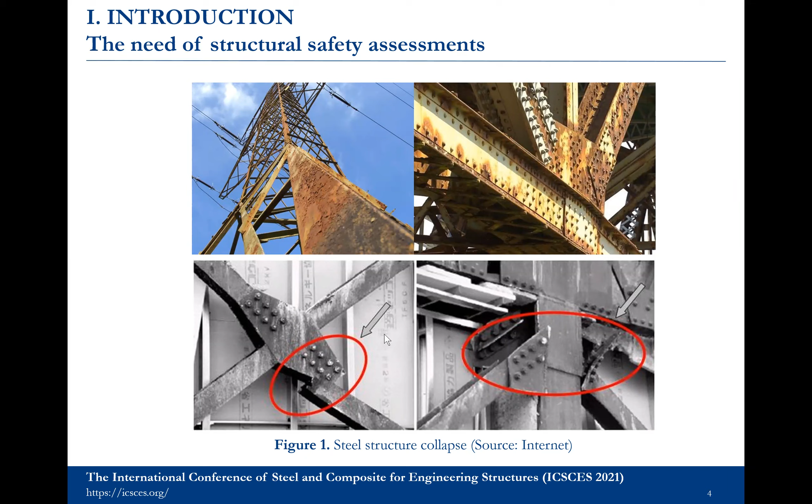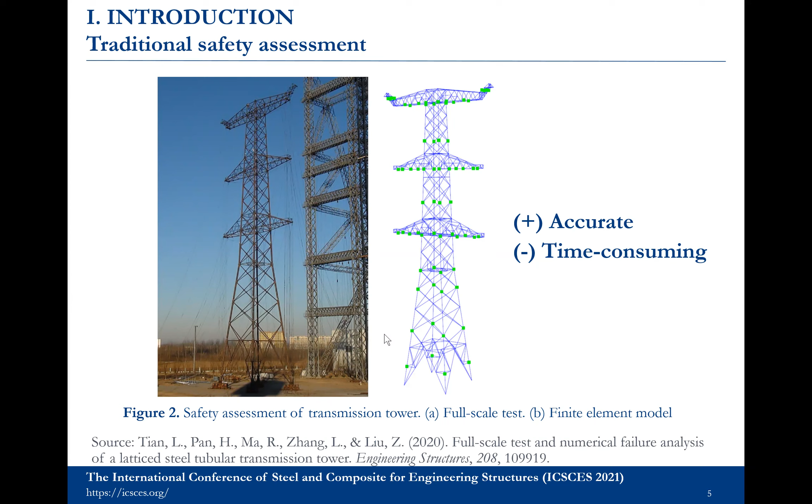The traditional safety assessment of structural elements is often investigated based on experimental tests or numerical simulation. It can accurately evaluate the safety of the structure, but is very time consuming. In some cases, there is a need for a model that can rapidly predict the safety state of a structure in order to promptly evacuate people from the structure if it is unsafe. After that, the structure still needs to be exactly rechecked by engineers.

The output of the model is a prediction of whether the structure is safe or unsafe. This is a kind of binary classification problem, and it can be solved by machine learning algorithms.

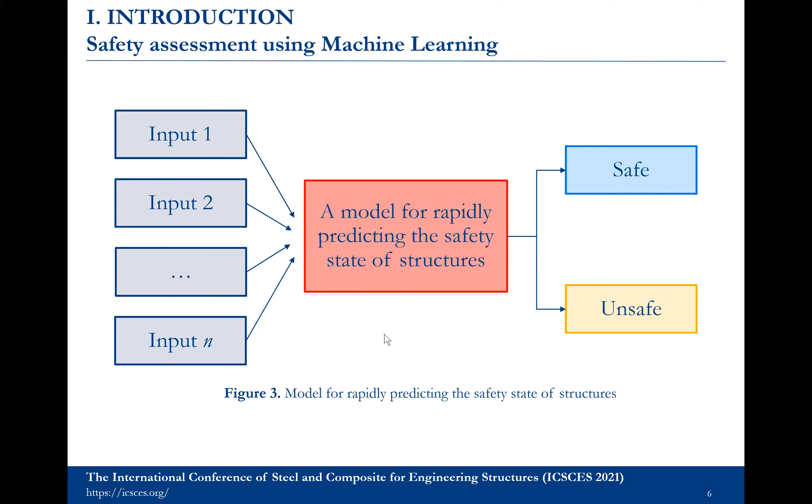Recently, ensemble methods have been particularly preferred. The concept of ensemble methods is to create a strong classifier from several weak classifiers. Some commonly used ensemble methods are random forest, extreme gradient boosting, and gradient tree boosting. Among ensemble methods, AdaBoost is known as one of the most powerful boosting algorithms for binary classification.

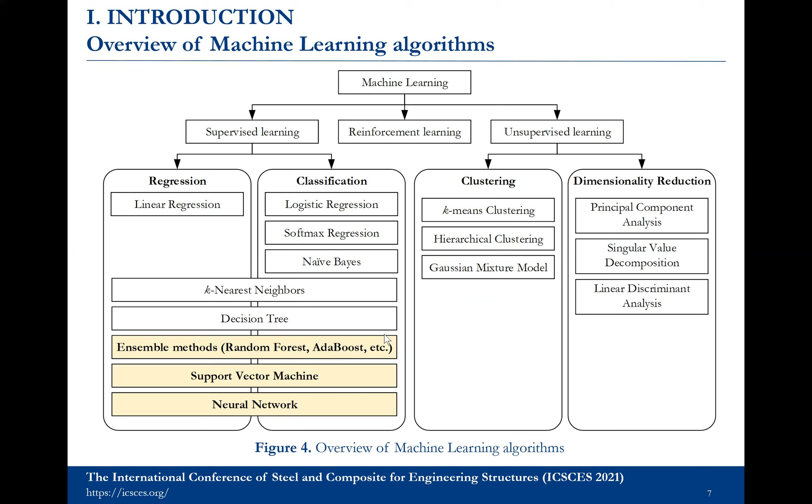So, this paper aims to investigate the capability of the ensemble method AdaBoost in evaluating the safety of truss structures. For this purpose, the performance of AdaBoost is compared with two popular classification algorithms, artificial neural network and support vector machine, in terms of the accuracy and the area under the ROC curve. The comparison is conducted on three well-known truss structures of 10 bar, 25 bar, and 47 bar. Additionally, an investigation on the influence of the parameters on the performance of the AdaBoost model is also carried out.

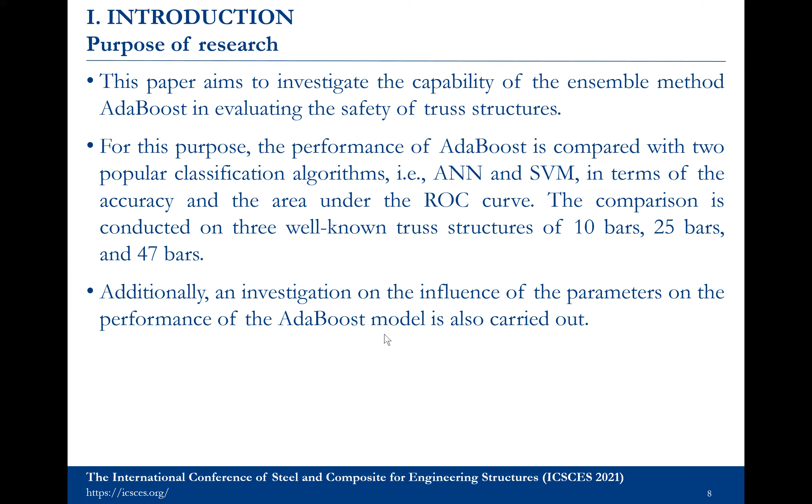Based on the results obtained from the structural analysis, design constraints are checked. If all constraints are satisfied, the structure is safe. Otherwise, if any constraint is violated, the structure is considered unsafe. Input and output are also saved into the database. Once sufficient data has been collected, the training process begins. If the accuracy of the trained model when verifying on the testing dataset is acceptable, this machine learning model is ready to use.

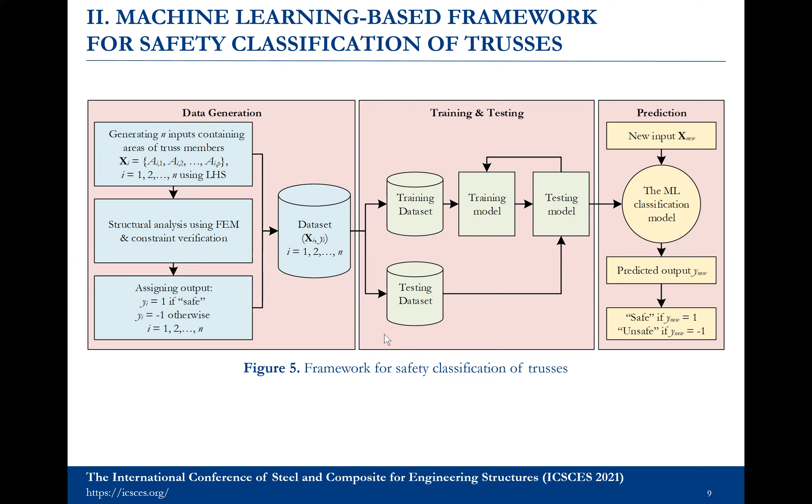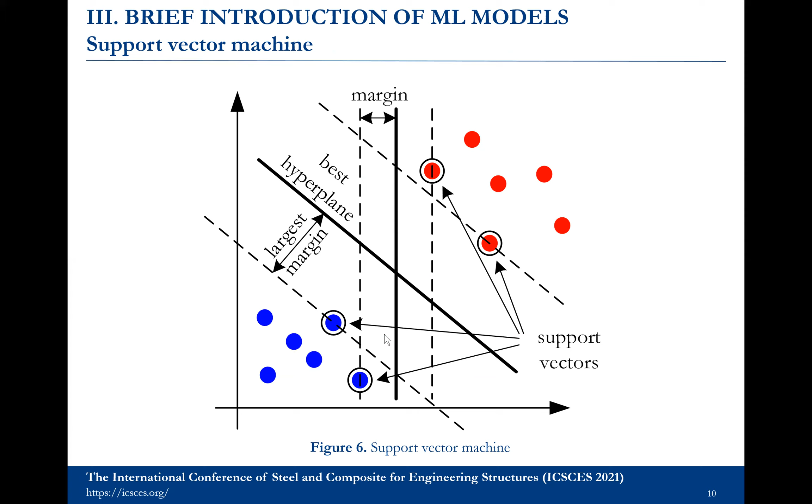So in the third section, three powerful classification algorithms are presented. First of all, this is the support vector machine. This algorithm was initially developed for binary classification problems. For separating data, the best hyperplane is found by maximizing the margin between it and the support vectors, as shown in figure 6. A kernel function such as sigmoid kernel, polynomial kernel, and radial basis function kernel can be used to separate nonlinear data.

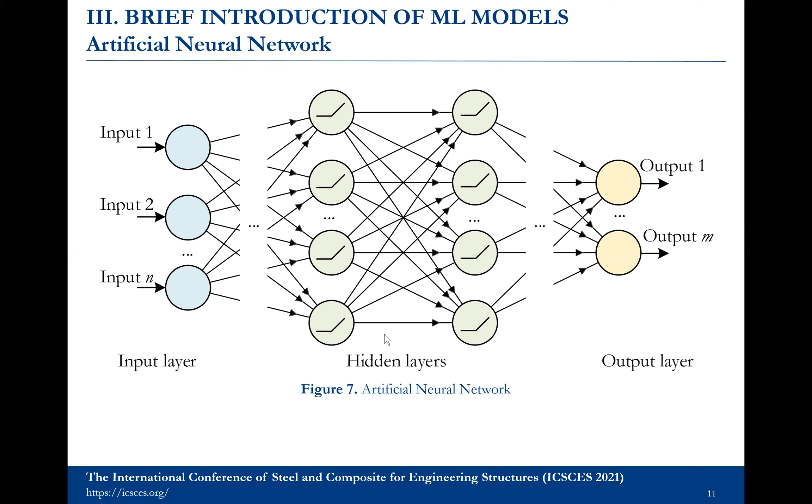The second classification algorithm used in this study is artificial neural network. The first neural network model that was introduced in 1958 contained only three layers: an input layer, a hidden layer, and an output layer. Each layer has some neurons where the activation function is attached to mimic the nonlinear data. State-of-the-art neural networks have more than one hidden layer, which allows learning extremely complex data. Figure 7 presents a typical architecture of an artificial neural network model with multiple hidden layers.

And the final classification model used in this study is adaptive boosting, or AdaBoost. The base classifier used in the AdaBoost model is a decision tree. However, a deep decision tree can be overfit on the specific data set. To overcome this problem, the AdaBoost model uses several shallow decision trees, which are sequentially trained by the weighted data.

Each decision tree is assigned a weight based on its accuracy. The final prediction is determined using the weighted majority voting method. The illustration of the AdaBoost is shown in figure 8.

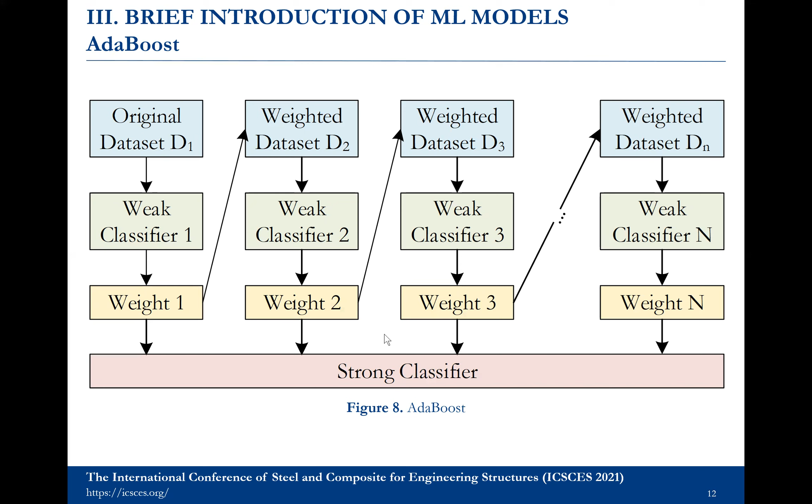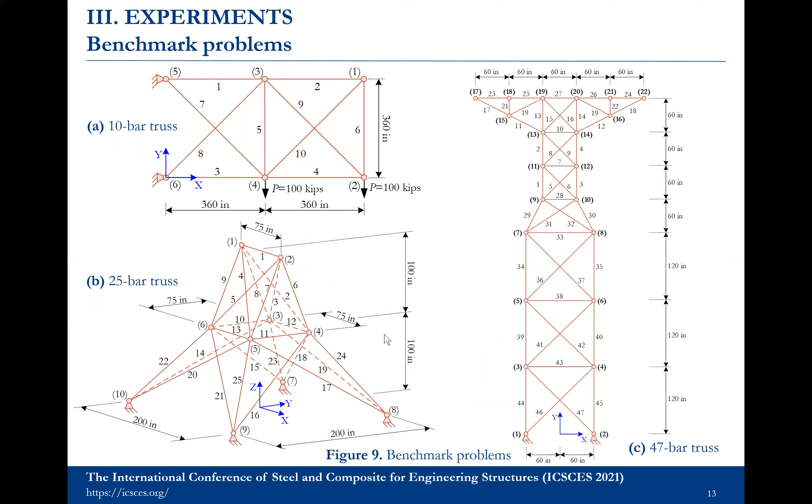So, three benchmark problems are considered in this study. The first problem is the 10-bar truss, the second problem is 25-bar truss, and the final problem is 47-bar truss. For each problem, two different data sets are generated. The first data set is the training data set, and the second one is the testing data set. The distribution of safe and unsafe samples in the training and the testing data sets is shown in figure 10.

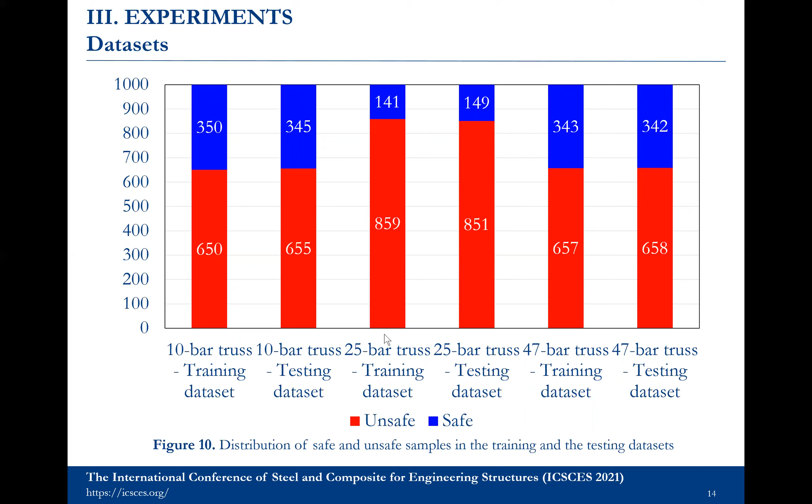Machine learning models for evaluating the safety of truss structures are developed based on the open source library scikit-learn. There are three numerical examples and three classification algorithms used in this work, so a total of 9 models are developed. The hyperparameter tuning of the machine learning models is conducted by combining the grid search method and k-fold cross validation. The training dataset is divided into 5 parts, in which 4 parts are used to train and the remaining one is used to validate. The obtained values are summarized in table 1.

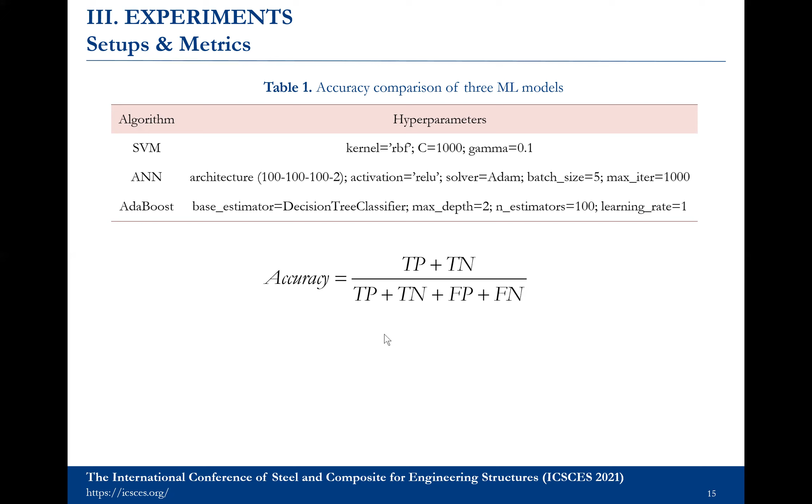After finding the hyperparameters, the full training dataset is fed into the machine learning model. When the training process is complete, the models are ready to predict the structural safety state of the testing dataset. Two metrics are used in this experiment. The first metric is the accuracy, and the second one is the area under the ROC curve. Each problem is carried out 30 times, and the average accuracy of the 3 machine learning algorithms is summarized in table 2.

It can be seen that for the two problems of 10-bar truss and 25-bar truss, all 3 algorithms achieve high accuracy over 90%. Particularly for the 47-bar truss problem, the accuracy of the support vector machine and the artificial neural network models is quite low, below 70%, while the AdaBoost model still retains a high accuracy, about 97%.

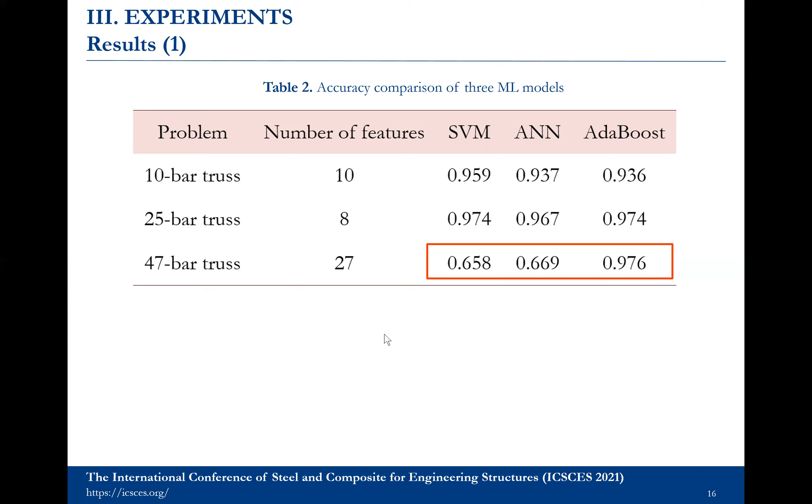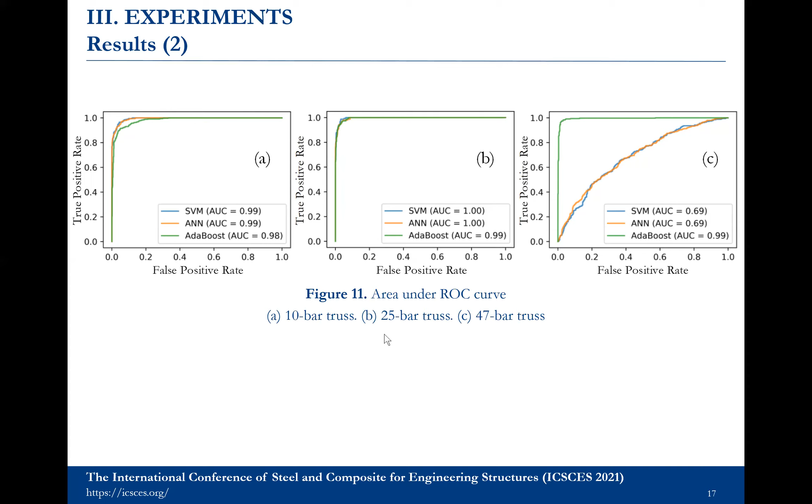Figure 11 shows the typical ROC curve of the machine learning algorithms for 3 examples. There is a good agreement when comparing the 3 algorithms in terms of the accuracy and the area under the ROC curve. In more detail, support vector machine, artificial neural network, and AdaBoost obtain an area under the ROC curve close to 1 for the first two problems. However, the support vector machine and the artificial neural network obtain an area under the ROC curve of 0.69, while the AdaBoost model achieves an area under the curve of approximately 0.99 when classifying on the 47-bar truss testing dataset.

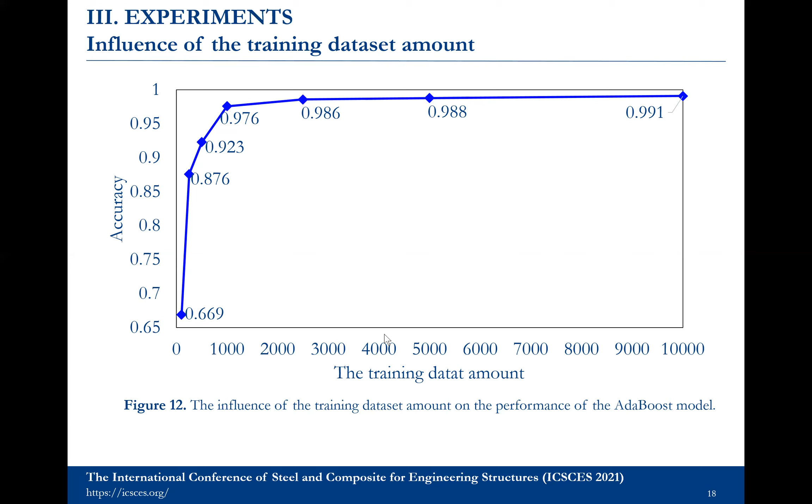It can be observed that the accuracy of the classification model significantly improved when increasing the number of samples from 100 to 250, while augmenting the training dataset to 500 samples, the accuracy achieved 0.923. Generally, the number of 1000 samples is a good choice when balancing the accuracy and the quantity of the training data.

An important key factor of an ensemble model is the number of base classifiers used in the model. In this study, 6 AdaBoost models are compared where the numbers of base classifiers are 5, 10, 50, 100, 500, and 1000 respectively. The models are trained by the same 47 bar training dataset of 1000 samples. The prediction results are presented in figure 13.

It can be clearly seen that the accuracy of the AdaBoost model is greatly enhanced when extending the number of base classifiers from 5 to 50. However, when increasing the number of base classifiers from 50 to 1000, the model quality does not improve.

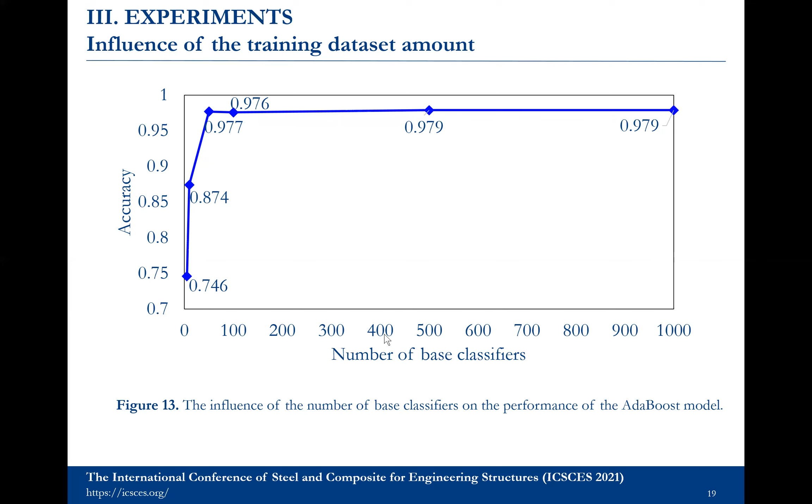Finally, some conclusions are summarized as follows. In this study, three machine learning algorithms, including support vector machine, artificial neural network, and AdaBoost, are used to identify the safety state of truss structures. The results of the present work demonstrate the potential application of machine learning for structural safety evaluation. For small-scale structures with few input features, all algorithms achieve high accuracy. However, for large-scale structures having many input features, the AdaBoost algorithm exhibits a strong ability in comparison with other algorithms.

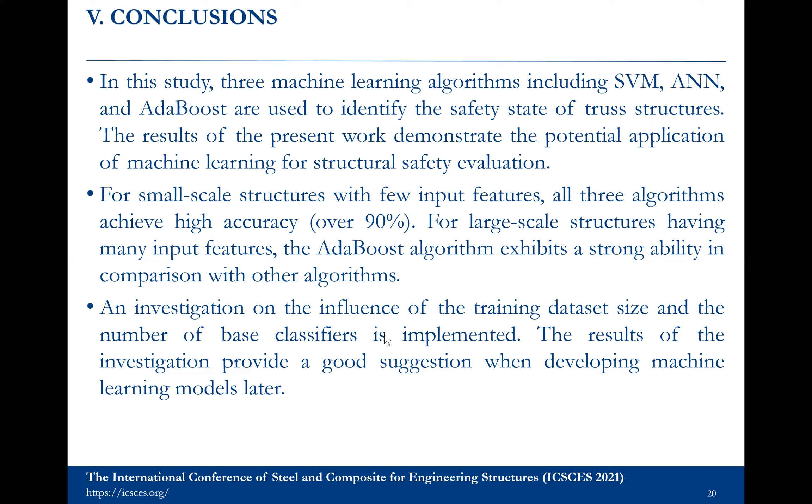And an investigation on the influence of the training dataset size and the number of base classifiers is implemented. The results of the investigation provide a good suggestion when developing machine learning models later. So this is a short presentation of our work.